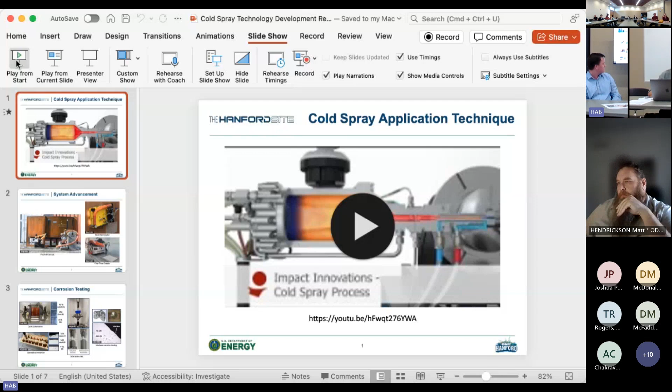So what I want to go over next is a little bit more of the chemistry. If we could have that first slide. So I just want to show you the cold spray deposition process, and I found this video to be beneficial. I'm a very visual learner, so I hope this can assist you guys as well in seeing this process. It might have sound, so you might want to not play it.

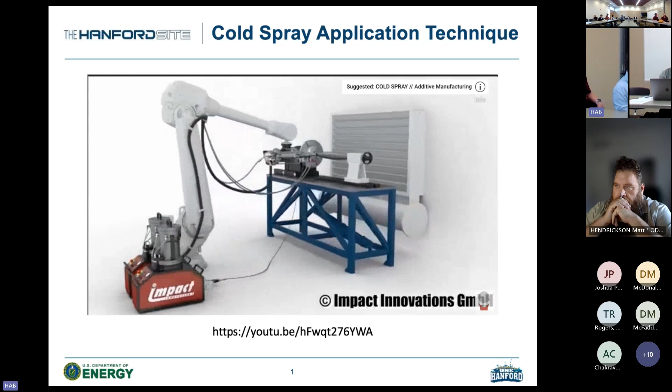It's a stationary cold spray setup. We're going to zoom in on the heater, where you'll see gas going through, heating up, and going out through the spray nozzle.

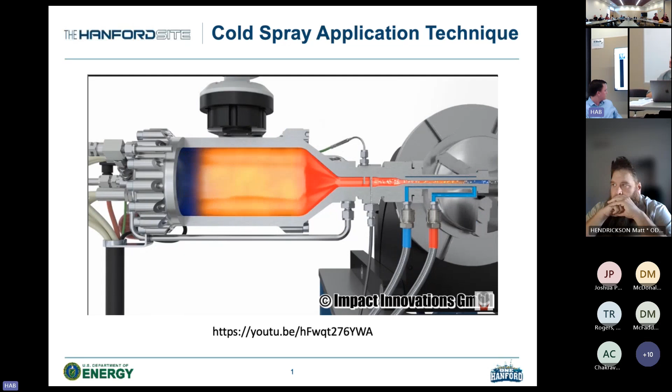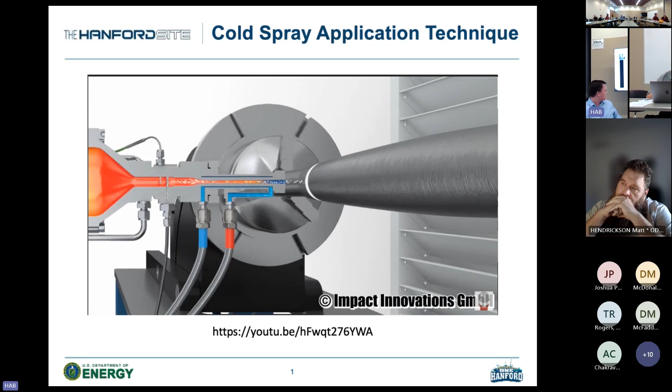The thinner section is the spray nozzle. The cold spray process starts by heating up a pressurized gas. In our case, we're heating up nitrogen gas to 650 degrees Celsius. Once that desired temperature is reached, metal powder particles are introduced into the spray nozzle and they exit at supersonic speed. The cold spray coating is actually formed through ballistic impingement of those materials onto the substrate.

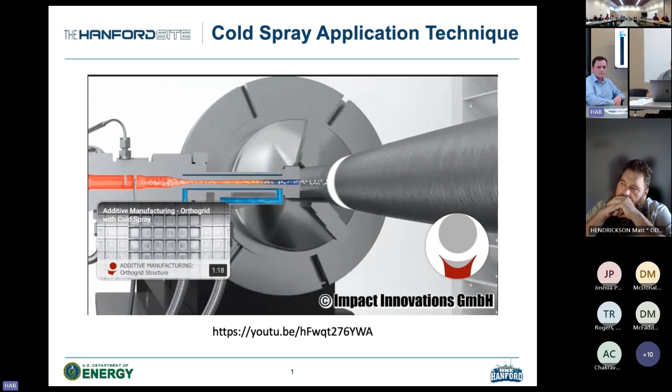This deposition occurs at a temperature well below the melting point of the metal powder, so it generates no heat affected zone. There's virtually no time for oxidation or for particle phase transformation. So that's the cold spray process—that's about the extent of the fine details I'm going to get into.

You can also just apply it. What we are proposing is to apply it robotically, which has a more consistent finish, so you don't need to go back in and machine over top.

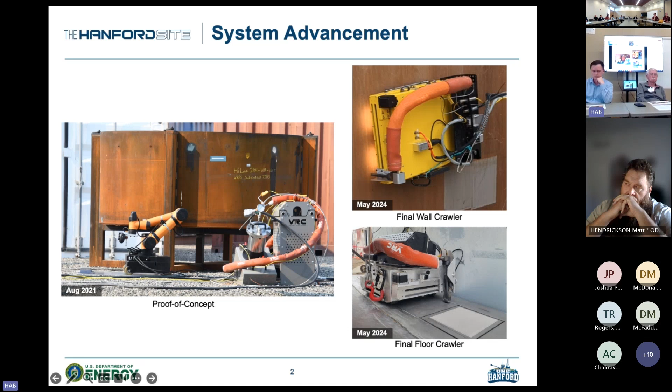We also made adjustments by reducing the overall size and weight of the heater. The big box in the proof of concept image labeled VRC houses our heater. We reduced the size of the heater and incorporated it onto our final wall crawler and floor crawler—it's covered in a black shroud, that's what you see for the heater. That heater weighs 28 pounds, so we needed to increase our magnetic pull strength from those 4 permanent magnetic wheels to suspended magnets instead, which had greater pull force to keep our system adhered to the sidewall.

We also upgraded that 6 degree of freedom arm that had the nozzle at the end, exchanging it with a raster system. The raster holds the nozzle and just goes back and forth while the cold spray is being applied. So that's the difference there—got that a little bit compacted.

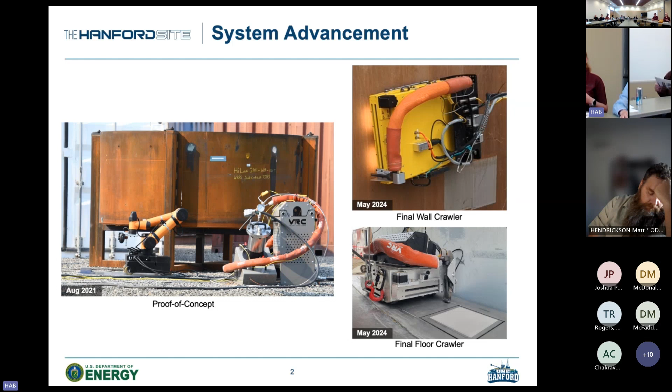Once we completed our wall crawler design, we then moved on to the floor crawler. The wall crawler is designed only for adhering to sidewalls for sidewall refurbishment, while the floor crawler needed to be smaller since we only have 18 inches of flat space on the annulus floor in that 30-inch annular space. We needed to compact that system down, which took a little less than 6 months to complete. The success is that we use basically the same components, just in a slightly different configuration, so it works the same.

In parallel to developing the equipment, we also performed corrosion testing to assess performance of the cold spray patch, whether within the annulus environment or if it were to come into contact with tank waste. We wanted to know how that patch would effectively respond. We performed accelerated corrosion testing, including cyclic polarization, galvanic corrosion, alternate immersion, slow strain rate testing, and hydrogen embrittlement testing. We started with 8 coating candidate materials including mild steels and stainless steel, and narrowed that down to 410L stainless steel as the ideal feedstock for Hanford site application.

I want to highlight the collaborative effort that went into these studies. We had input from Savannah River National Laboratory, the University of Alabama, EMP Laboratories, VRC Metal Systems—our subcontractor who performed the work—and the Tank Integrity Expert Panel Corrosion Subgroup. So there were a lot of people involved.

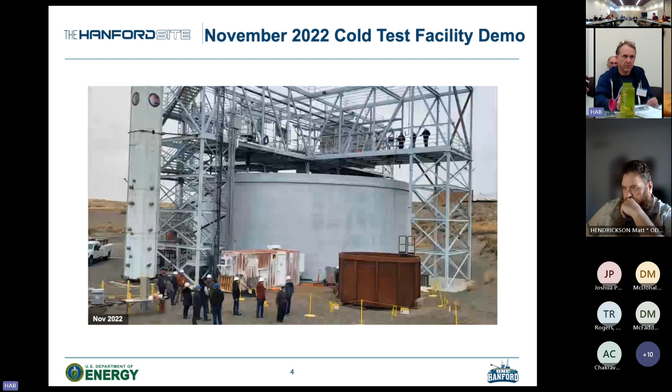What I want to do is show you a short video of the third demonstration, not this one, because I don't have time—we can come back to it.

I'm just going to talk to what you're seeing here. Before we play the video, this is the crew setting up on the mezzanine, the level above the tank. If this were out in the field, this would be at grade level. Where this gentleman is standing in the camouflage pants, right in front of him is a 24-inch riser in that floor, and we have a hoist situated above the riser for deploying our cold spray system down into the riser and the annulus at the bottom of the tank.

Something else shown here is this Raptor control box. This control box is needed for communicating with our robotic crawler, and it needs to be close to the riser. It houses the powder feeder, and it also connects the gas, electrical, and communications, linking that to the crawler by use of an umbilical. You'll see that umbilical—it's a big black cable in the picture, and I'll try to point it out, but it goes by a little fast, so giving you a heads up.

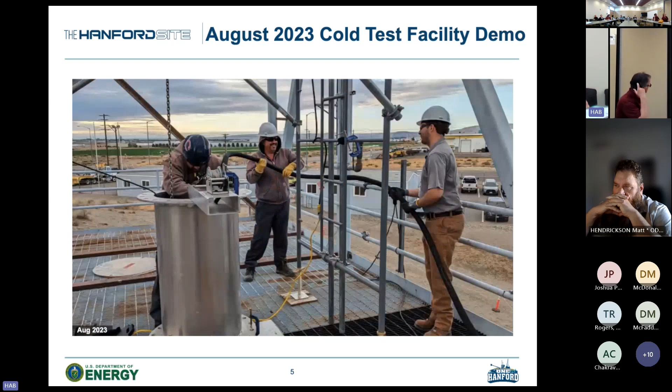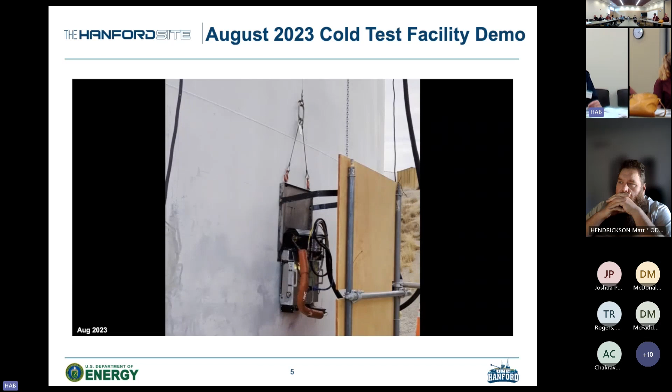So if you want, you can continue the video now. It starts with the gentleman connecting the electrical to our Raptor box, where the system is being deployed through the riser. You can see it's a constrained space we're working with. Once the system is deployed to the annulus, with that wall being our mock annulus wall, the tray braces itself up against it and our system drives off.

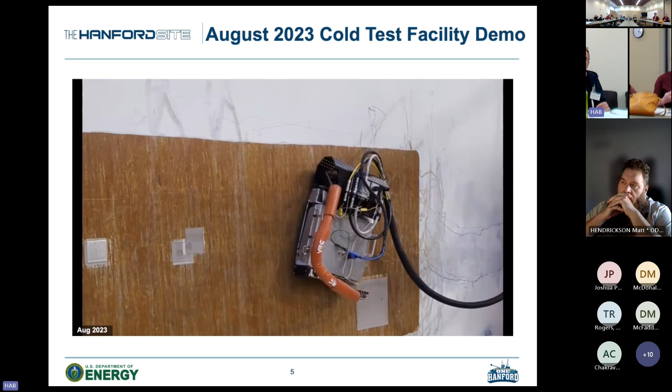We were able to show that our wall crawler could withstand the weight of 100 feet of tether—that's the maximum distance the system could go in the tank. We then positioned the crawler to a desired location to start spraying.

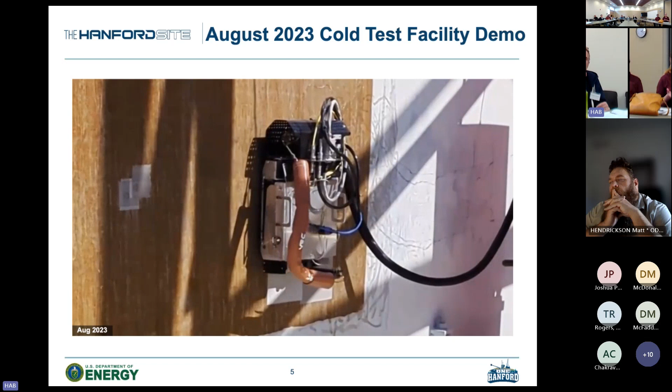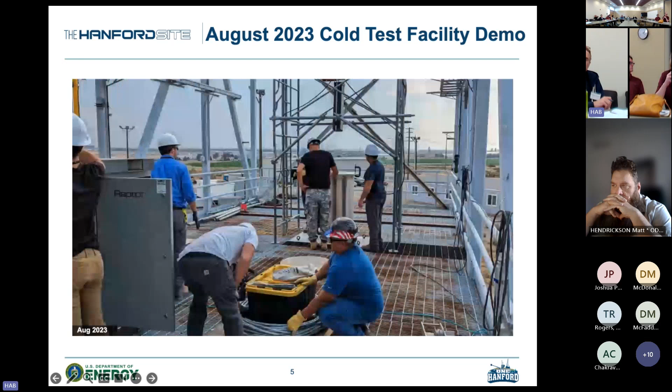What I want to talk to, which is not shown, is that we perform coupons—we spray coupons in the field before and after we actually spray the true patch. That way we can analyze if the system is performing as anticipated and desired. This is one such coupon you would generate out in the field—this is mild steel with 410L stainless steel on top. You can pass that around and see the coupon material—again, that's the stainless steel on top of a carbon steel.

That specific coupon was generated early in 2023. And so we have since performed some improvements on our powder feed selection and those material properties. So we have refined that surface finish to be a little bit smoother.

And then this is the final slide. This shows the cold spray patches that were placed at the cold test facility. I'm showing you these to basically show the validation that we can deposit a thick patch if desired. We're shooting for something greater than 1/8 of an inch thick, and we actually came up more like 1/6 of an inch we placed down.

We also showed how you can overlap patches with each other. So there's no problem if you needed to butt them up against each other, either to go over it again to add additional thickness, or if it needs to be extended, you can spray over top an existing patch.

And then the larger patches were just to show the maximum widths that we can achieve with these systems. So the cold spray wall crawler has a maximum raster width of 11 inches, and that can be kind of an unlimited length, because the cold spray system rasters across a maximum width and just steps down, then comes back up to build up those layers, going down and back over. The floor crawler has a maximum rastering width of 8 inches wide. So that's what that system has.

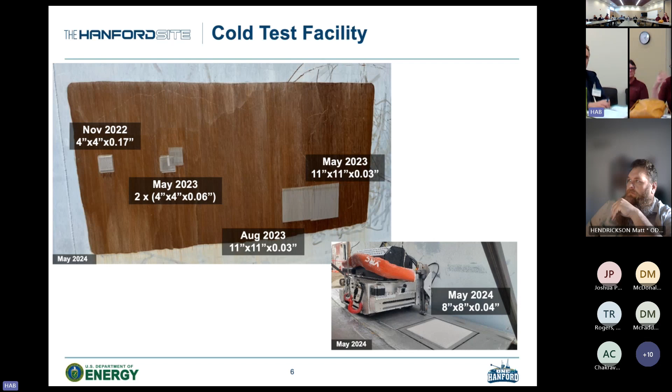So with that, I think that's the information I had prepared to talk to you guys today. And again, I hope you can see the achievement that we reached in taking a system from a concept to a final product in a little over 2 years. We can talk more about the tank integrity expert panel or our other collaborators, but I believe we used a thorough and robust approach in our development, and I want you to feel comfortable knowing that this technology is now out there and has been perfected to potentially be used as a refurbishment method for Hanford's double shell tanks.

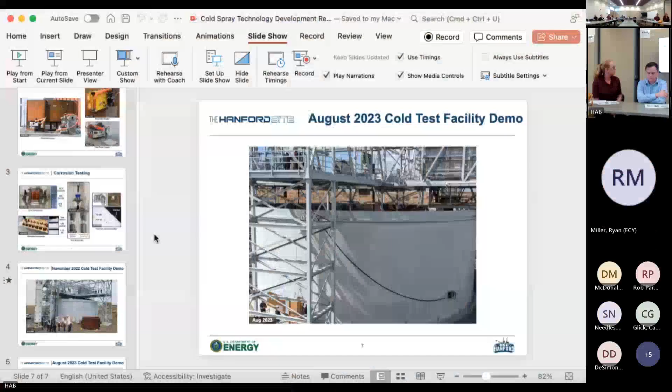That is great. Let's see if we could advance the slides, I think it's slide 3. Could you? Yep, I'm working on it. Okay, yes, that's the slide.

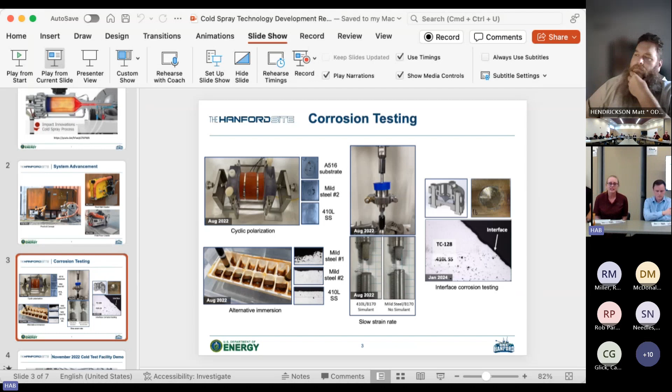If you look on the right-hand side, there's a black and white image. I've denoted TC 128, that is our mild steel, representing our tank waste, or our tank liner material. And then you have 410L stainless steel. You can see a division where those two materials meet, and in the 410L stainless steel you see black dots. Those black dots are voids, or part of our peening material, which is a ceramic blasting bead. So you can see the porosity of these samples.

That's what we do with these coupons. We take a thickness measurement, look at them visually in the field, then take them back to the lab. We section them off, look at them underneath the microscope, and calculate the porosity of that material. It's right around 1% porosity, and that's very good. I want to say the word porosity might scare people, but these pores do not actually form a connection with each other, so this is not a porous material in that sense. I hope that answers your question.

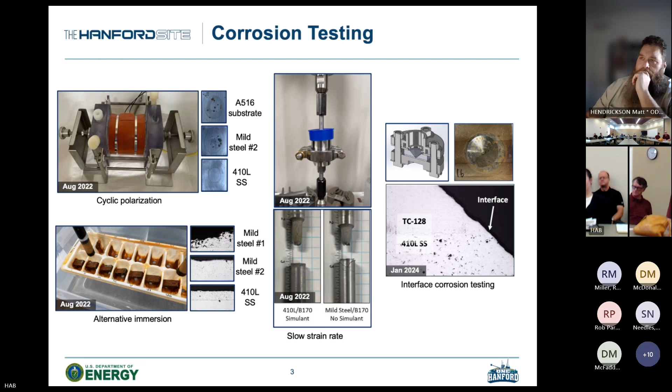Other questions in the room or online?

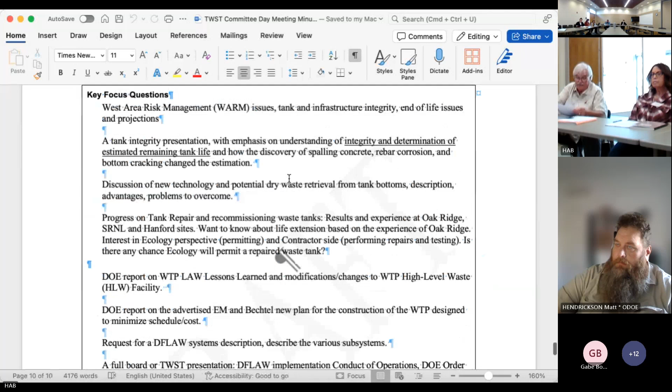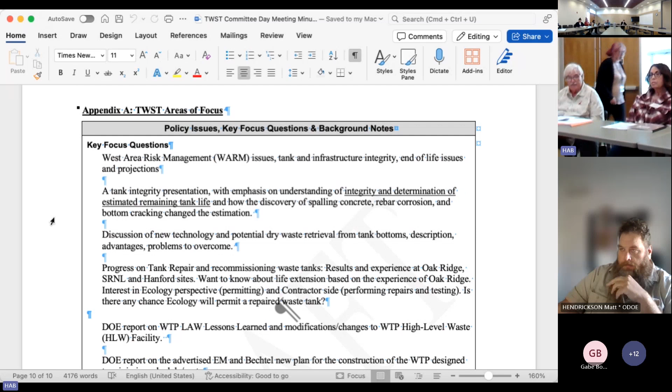Okay, here we are. Okay, so we had some key focus areas that people had suggested they'd like discussed in our committee, or with the leads committee, or the home committee. So I went down that list—if we can pull it up, it's there right now—and let me just read it to you.

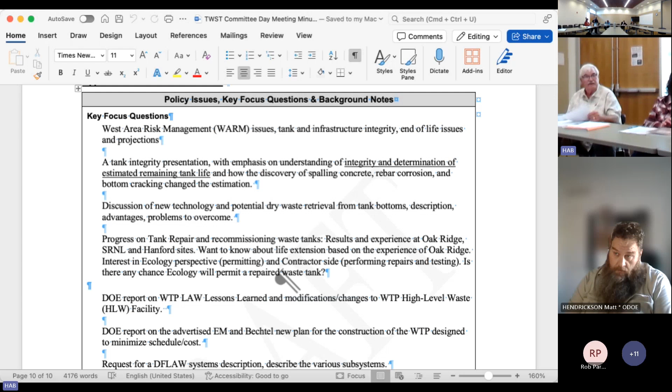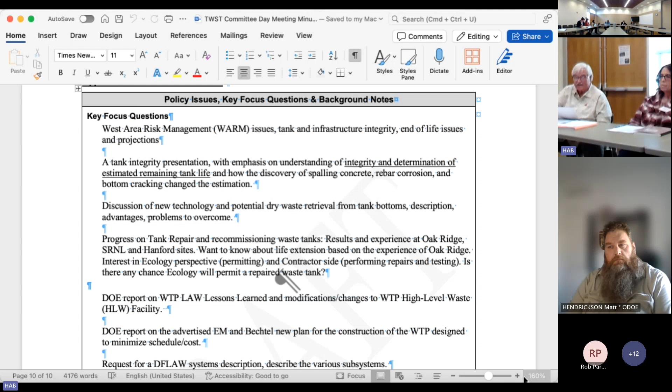Okay, I'm watching it there. The second one is—so in our last few tank integrity presentations, we've heard a lot about how they're getting measurements and things of this sort. There was some discussion among some of us wondering, well, what does it all mean for us? What does integrity determination mean? What is the estimated remaining life, and how are they determining it for the tanks? And specifically, when they point out they discovered spalling concrete in the domes, corroded rebar, cracking on the bottoms of the tank—I think we need to ask more questions: when is the tank done? Where is it happening? Because letting it go till it leaks is kind of against the WAC code, for sure.

So, today we do have a presentation of new technologies that they've been developing called cold spray, which was a real good issue that we got.

Other new technology teased to us was the potential for dry tank retrievals. In other words, drying out a tank and then putting a little tractor in there and scooping everything out, or doing it pneumatically.

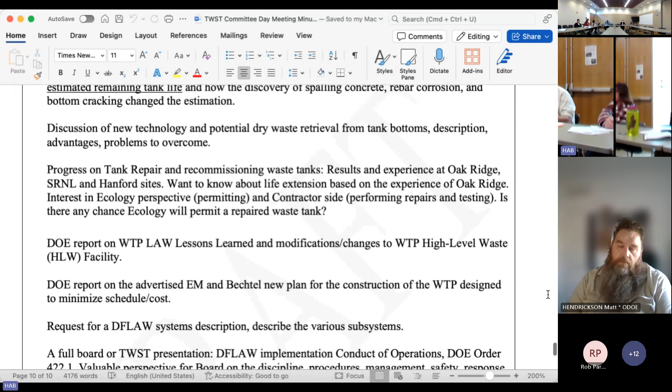We also had a request to make sure that we get the lessons learned from LAW startup transferred over to the high level waste project.

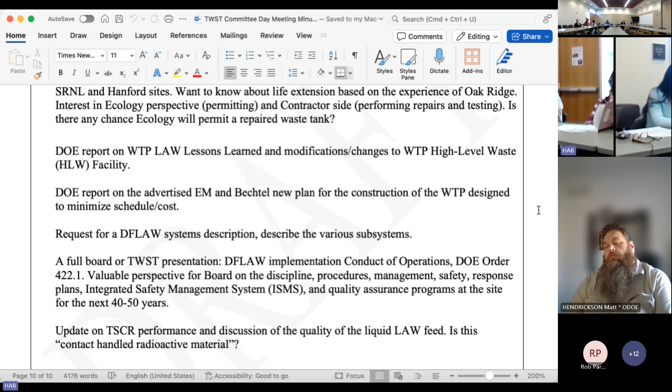The next one on the list was a discussion of DOE advertising that EM and Bechtel had a new plan for the construction of the high level waste to minimize cost and schedule. We should think that should be kind of high on our list of understandings.

Another one we had - maybe Chris, you can explain this next one - your request for the conduct of operations and description of the system descriptions for the LAW or DFLAW facility. There wasn't so much conduct of ops, although that's a major part of it, but we've heard a number of times at DOE that in the DFLAW, there are 25 separate subsystems.

My concern is, how are you going to get all of those 25 subsystems day in and day out to routinely work in sync with one another, where you don't have one subsystem shut down, something go wrong, and you have a domino effect that shuts down everything upstream of it.

Process control is a major concern. Consistency of operations, which gets into conduct of operations, where you're doing the same thing day in, day out, 24/7 for 40 years, with all your subsystems working perfectly in sync. With that many subsystems, it's not straightforward to assure how you're going to get consistent operations over long periods of time.

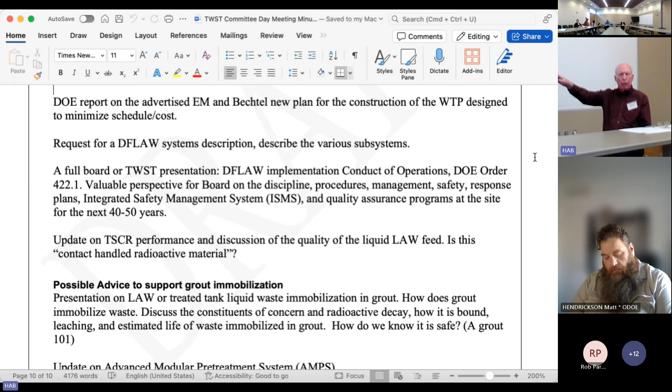I know from when I was in the oil industry, I had a little bit of exposure to CITGO's refinery operations, and they have something like multiple hundreds of subsystems working that they have to manage, and it's a major problem. That refinery had a process control group of 100 or so people just to keep all the subsystems working. I'm kind of wondering how it's going to work here. It may seem simplistic, but it's really not.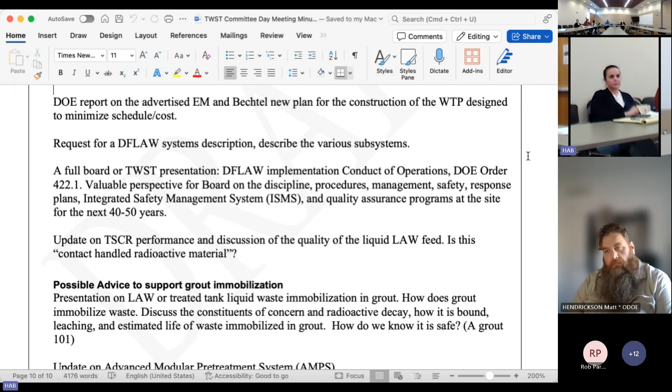That would be a Matt Irwin thing, so I will take it to Matt and see what he can come up with. And the last added item is an explanation of the ISMS process at the site and how it works.

Okay, the next request we had was an update on the TSCR performance. We had somebody report to us last meeting that it was producing contact-handled radioactive material, so we need a better explanation of what the quality of the water is that's coming out in the TSCR process.

So grout is still an issue, and I know you're working really hard to do something there, and I won't hit on it anymore other than it's still an issue. Yeah, I know that's one you guys are itching to get, and as soon as we have something available, we'll bring it forward. I would anticipate an update on the timing on that early next year.

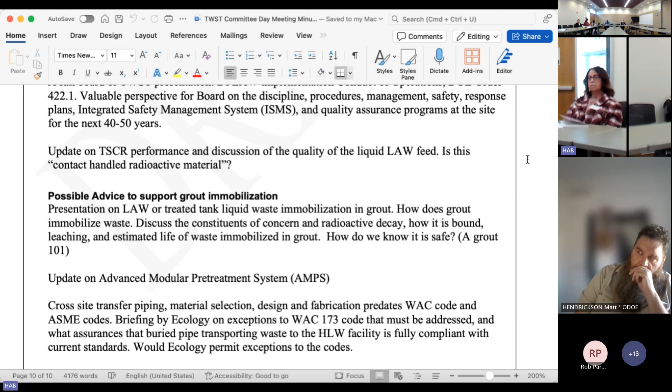And then again, I see cross-site transfer lines coming up. I was told at the end of FY25. They said we can put it on the work plan, but at the end of FY25 is when we should be able to bring a briefing.

I have another item on grout I'd like to put on the table too. At the 5-year plan last night, we heard that the schedule called for all 2,000 gallons of the test bed initiative to be shipped by the end of 2025. What doesn't appear anywhere else in the 5-year plan is what's going to be the end product of this exactly.

How will results, or when will results be made public? What decisions will be made on the results? So on and so forth. So what's the end of this project, and will the public be involved in any way, shape, or form?

I talked to Del Mar a little bit after, and I'm not sure he understood what I was getting at. But I think it'd be good to have some type of presentation somewhere, or some informal discussion, about what the end of this project will look like.

The documenting of the TBI results is going to be very important, having a report on those. Del Mar said the analytical results we should get by the middle. I said I'm not so concerned about the analytical results, I want to know the disposal results, the grouting results, all that stuff at the end, which is what a lot of concern is being voiced about. Okay, I can take that back and see what we can bring forward on that.

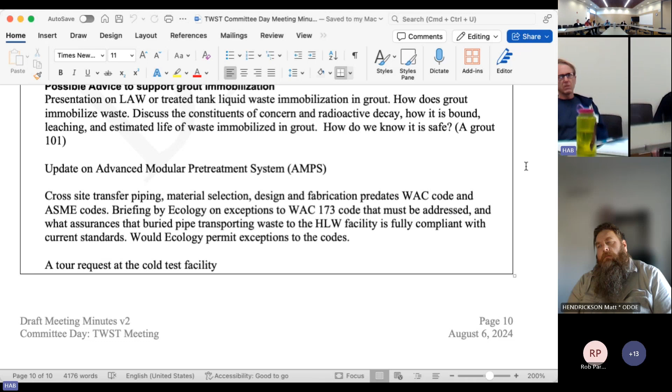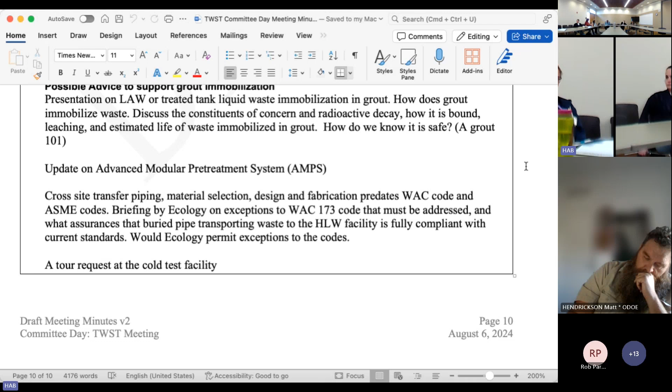Okay, but I've heard that there are some formulations that the words that it said was like, it's getting to the point where it may be as good as glass. And it'd be interesting to learn more about that.

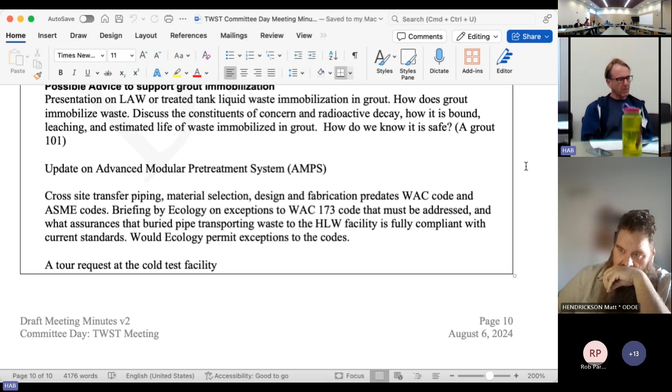But if it's proprietary, yeah, understand. And it's good to have these conversations at this level, because when we go back to our subject matter experts and say hey, they'd like a briefing on grout, well, what about grout? So I think just getting this type of input at this level will help us better frame those briefings and ensure we're providing information that you guys are looking for.

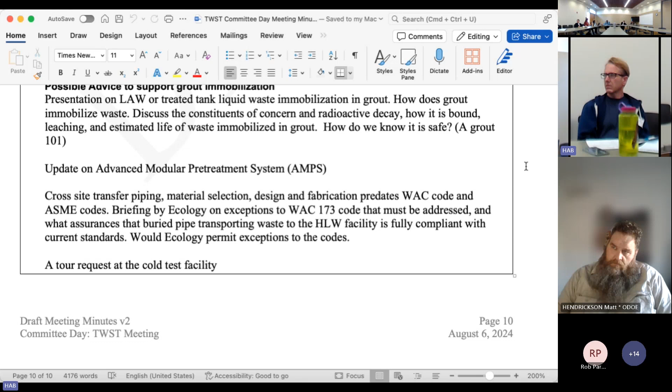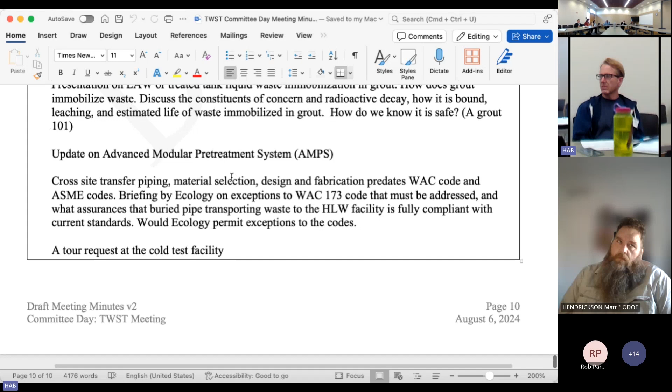And I read in an AR, I don't remember the number of it, that different waste compositions require different formulations of grout, because some are acidic and some are basic and some are metallic heavy, and that kind of flies in the face of a contractor coming in and saying their grout formula is secret, unless they'll provide test materials to assure that grout is stable and solid.

And I talked to a couple of the DOE guys during our tour about grout, and they kind of implied the same thing, that one tank may be fine or four tanks may be fine, but the same formulation does not work for everything unless there's some magical thing there. And I don't know magical things very well.

Well, unfortunately I am not a grout expert in any way, shape, or form. So I don't have a lot of technical input or be able to respond to questions like that, because I don't know the answer. But Chris, do you have something to add?

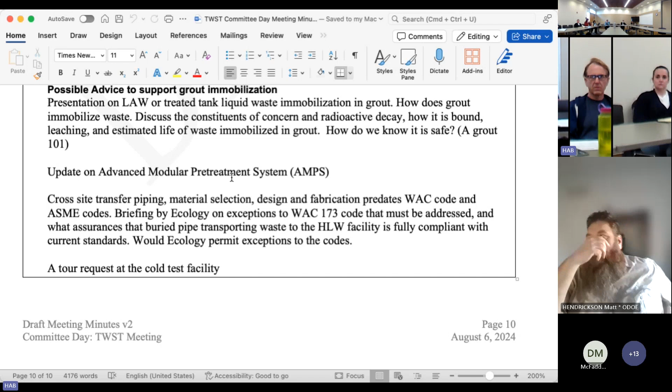Yeah, I've written a paper on grout basics. I ran it by Rob and Rob was good with it. It might be called grout primer. And I've almost got it all into a PowerPoint presentation. And it's not about grout at Hanford, it's just about grout generally, a few basic concepts so that people on the IM team or people in here have a better understanding of some of the basic concepts. It has nothing to do really with Hanford. Hanford isn't mentioned, tank farms aren't mentioned.

It's not pushing for grout, it's just everybody should have some technical understanding of why grout works, what some of the problems are. And I put that together in a paper and PowerPoint presentation. And this is something that somewhere down the road I'd like to give to this committee or to the IM team. Let's talk about that.

Yeah, I understand, and I don't have to send it to Washington. I don't believe they have it approved. Well typically when it comes to some type of technical briefing, we will have our technical experts bring in those briefings at the subcommittee level, but I think at the IM team level it would be more appropriate for you to give that brief.

I learned during the tour that most of the grout used on Hanford is almost popcorn-like grout, like the foam you stick flowers in, only heavier. It's not concrete. There are different grout mixtures for void filling versus immobilization, and I'm sure the immobilization material is made differently. There are a lot of different levels to that.

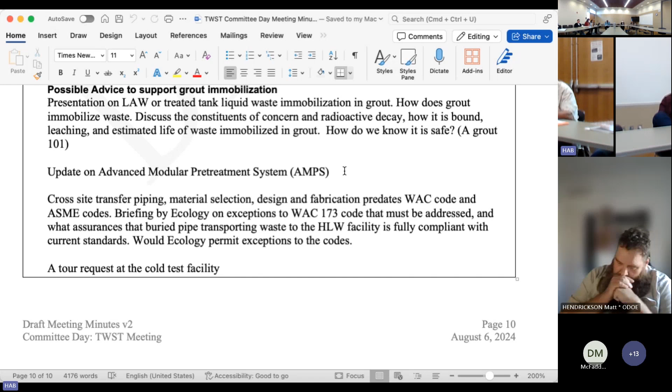The other thing is we'll probably need an update on the Advanced Modular Pretreatment System. Yesterday's meeting cleared up a lot of stuff for me, that they were talking about having something similar to an AMPS put over in the west area, risk management area. So maybe we could make sure we get an update that talks about both of those.

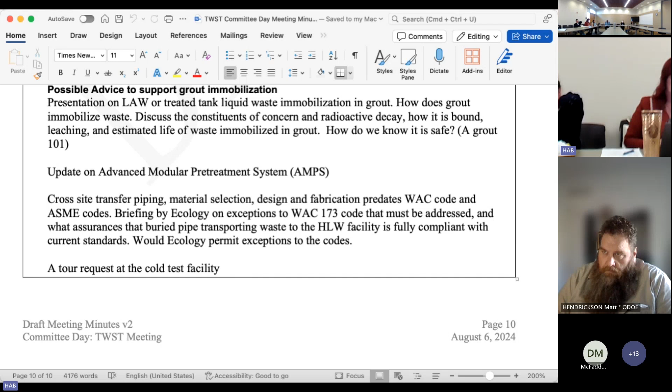When did we have Janet come last? Janet Dedeker came and gave us a briefing on the AMPS, I think in the spring timeframe, was it June or May? I think it was in June. We'll follow up with Janet and see if there's anything new we can share or when she anticipates something. I think she teased that the contract was going out in March. I'm looking at the email from her, her briefing was from May, looks like May 13th. I think we had full board in May, so it would have been June.

The last two items on this, we can cross the bottom one out because we did get a tour of the cold test facility. Thank you very much, that was good, that was a real good request.

The other is really when we hear about DOE's confidence in the cross-site transfer piping's ability to do its job and reactivate it. I think we need more discussion and more information on how a 50-year-old piping system can meet today's codes and standards, and see what Ecology weighs out of it, whether or not they have to take exceptions to the WAC code in order to use that piping. Per Richard Valle, by end of FY25 we should be able to report that briefing.

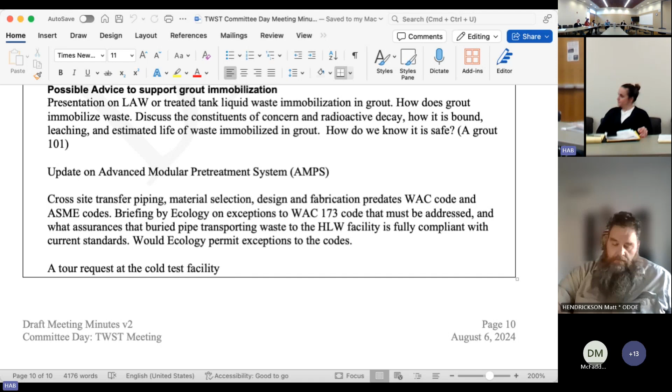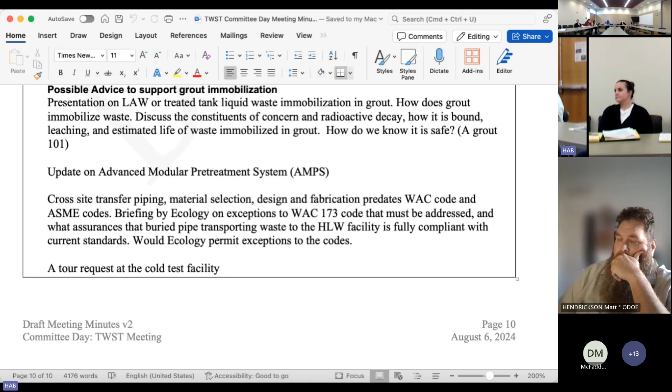I know from reading on the analytical part that slurry composition will be analyzed by the lab, sent back to the control room, and that the feed material is adjusted based on the composition of the slurry as determined by the lab. But I don't know if this is per tank, per 1,000 gallons, or whatever—exactly how all that works. I think it'd be an interesting presentation.

Plus, they've had problems with the feed system. That former feed system does not work for long, they have to redesign it. And that fits into that too. It's been redesigned, but it's not installed, it's not built yet, it has not been tested. Grit used to come in rail cars and went into some silos and the feed system didn't work. They've now switched over to bag grit and it's coming in by truck.